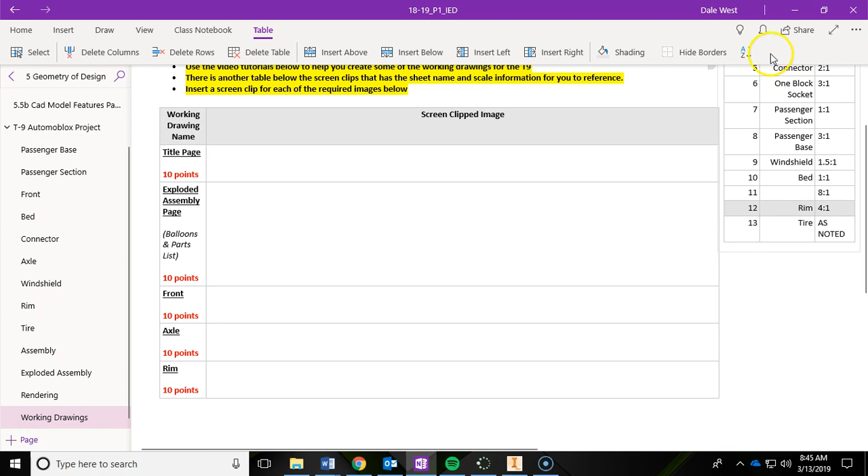In this video, we are going to be working on the axle in the working drawings that we've started for the T9 Automoblox. And I noticed one error that I had. I was missing the rim page. So if you're missing the rim page over here, go ahead and right click up here, make a new sheet, and add in the rim and fill out your title block. And remember, the scale is in here in the OneNote binder. We're going to be using a 4:1 for that scale when you're filling in that title block.

So for this axle, and if you notice, we're kind of jumping around a little bit, so I'm on page 11, so you can double click on your axle page. You'll notice that we again have a full section view, so that cut is going through the entire object from end to end. You have the arrows indicating which way the viewer is looking at it, so they're looking at it in this direction, which would actually be the bottom view, because this view is the front view. So they're actually going to be looking at it in that direction. So after the cut is made, you remove this portion of the material and look at it, and then this is what you would see to show all that interior detail, what's going on inside of the axle.

So we're actually going to be starting with our front view and then using our section view to cut through the object, and then we will add in all of our dimensions. Remember our standard procedures or order of operations. Add your views, add your center lines or center marks, and then save dimensioning for last. So let's go ahead and do this. So I'm going to go into my sheet. I'm going to place views. I'm going to bring in the base. I'm going to go locate the axle.

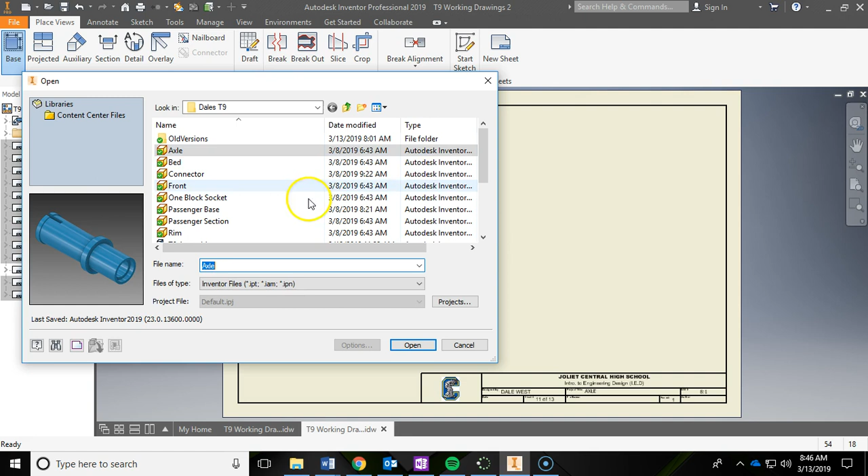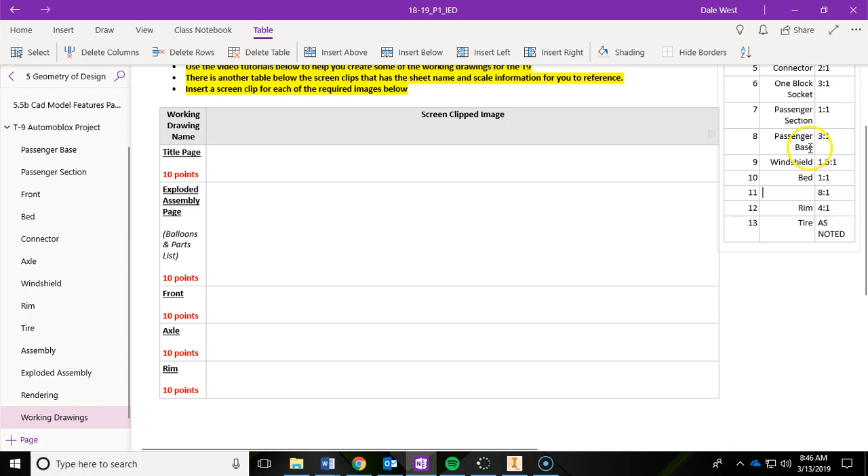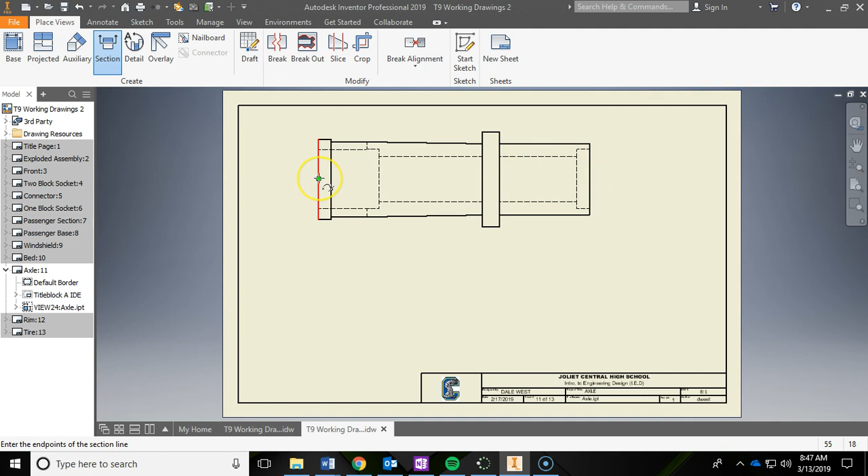And what was our scale on this? The axle, 8:1. What happened to my name there? I lost it. 8:1. So I'm going to have to just type this in. 8:1. Say OK. I'm going to move that up here. And then now I'm going to do my section view. So I'm going to click on section. And now I already had the view selected, so I'm just adding in the cutting plane. So I'm going to reference the midpoint here, because remember, I'm going to try and cut this thing right through the middle. So I'm just going to reference this, hover over it, move my mouse over, left click, go straight across, notice the perpendicular sign, left click again, and then right click, continue.

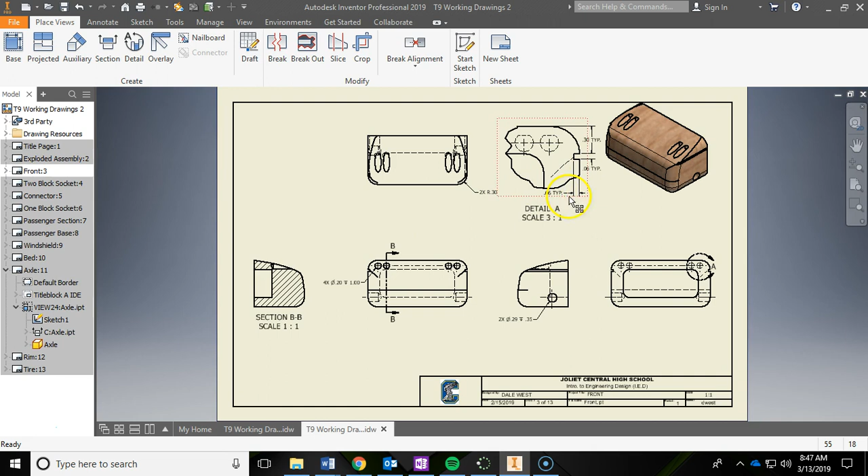And then if I move my mouse down, I can add in the full section view. Your labels may be different. Every time you're adding in a new view, whether it's a detail or a section, these labels keep adjusting. So if you remember when we were in the front, it started with detail A, then section B, and now if you notice, we're doing the next one, which is C. So it just keeps automatically updating that.

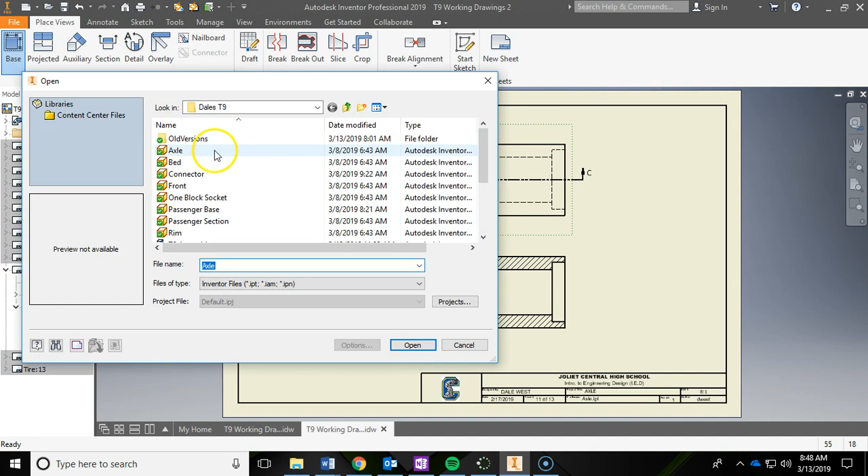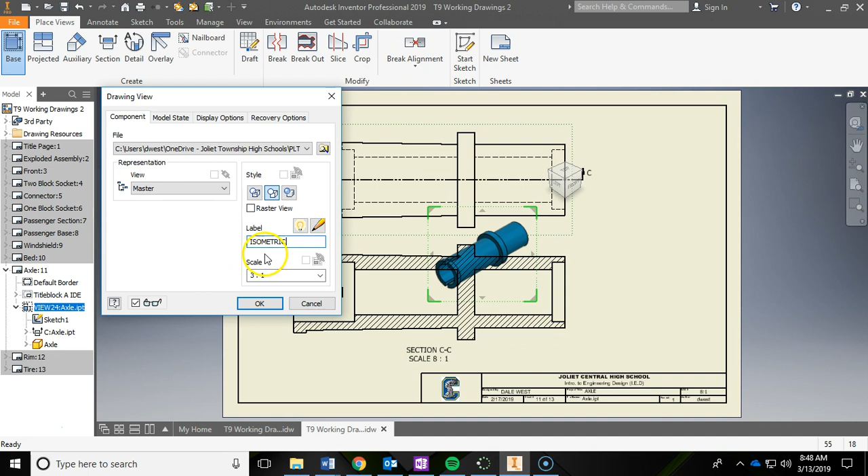The other view that I needed is an isometric, and that isometric is going to be at a 3:1. So I'm going to just go base view, go find my axle, switch to a 3:1, and then on the view cube here, you got to hit this little corner so you can get the isometric. And then since this is going to be at a different scale than the rest of the drawing, so the rest of the drawing is at a 8:1, we need to turn on our label visibility. So I'm going to click the light bulb, and then in all caps, I'm going to type isometric here. And what that'll do is it'll add a label underneath the view indicating the scale, like you see there. I'm going to move that up over in the corner, and then that should also be shaded. So I'm going to double click back into that and change the style to shaded like you see there.

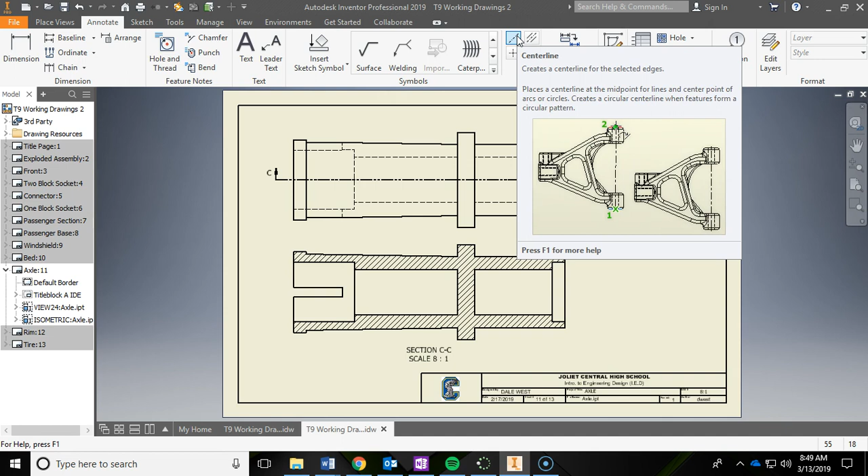And then, so we're done with placing all of our views. If you haven't done a save in a little while, go ahead and click save. Remember, the next thing in our order of operations is to do center marks or center lines. So I need a center line going directly through the middle of this. So I believe in the last one I showed you how to use this center line tool if you wanted to click from midpoints of two cylindrical shapes. Now I'm going to show you a different one called centerline bisector, where you're using outer edges of a cylindrical shape. So I'm going to click on centerline bisector, and for this one I'm going to use the midpoint of this line. I'm going to click there, and I'm going to click the midpoint of this line, and then I'm going to hit escape to get out of that tool.

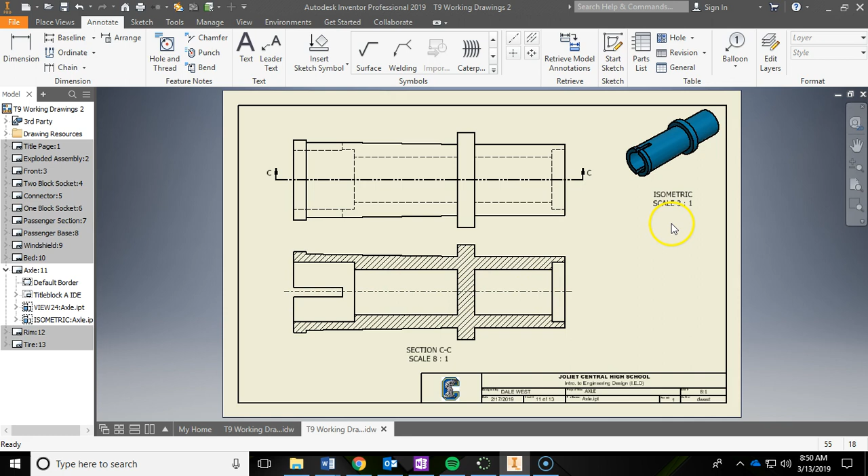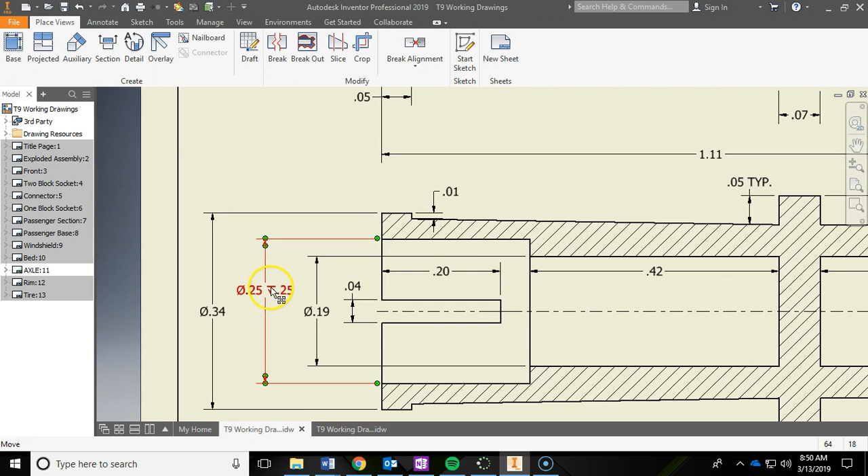Now we got the center line, but the problem is it's way too small, so I'm going to just hover over it, left click and drag it so it extends past the object on this side, left click and drag it so it extends past the object on this side. And now I have a center line going through the center of that cylindrical shape. The last thing that you'll need to do is add in all of your dimensions. Don't forget to add in typical. And then the other one that might look a little different to you is this one. It's showing depth, so it's telling you the depth of this cylindrical feature on that side, and it's telling you the depth of this cylindrical feature on this side.

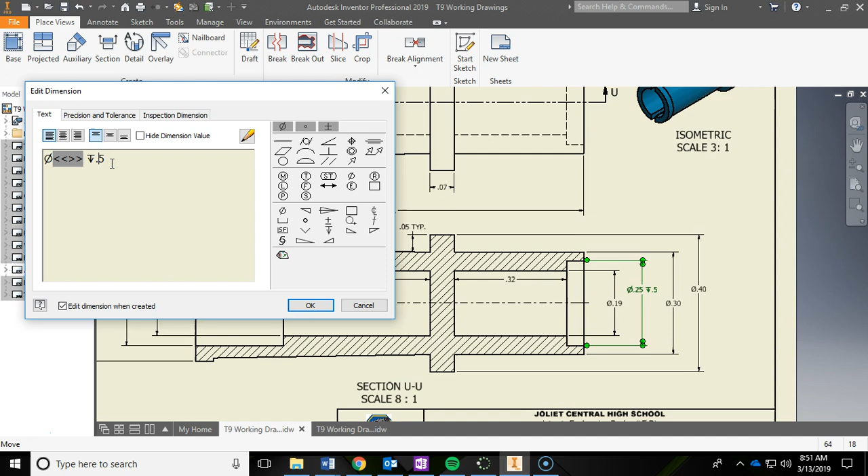So how do you add that in? Well, after you add the dimension with the diameter, if I backspace this, you're going to have to add in a diameter symbol for that, and you'll notice it's right here. So you just click your mouse in front of it, add the diameter, and then click your mouse after, hit space, and add in a depth symbol right here, and then type in the depth, which was 0.5 on that side, and then you can say OK. And whoops, I typed that in wrong. That's not 0.5, it's 0.05 on that side, sorry. So 0.05 for the depth on that side, 0.25 for the depth on this side. So this is exactly what your drawing should look like when you are finished. And then you can again go ahead and screen clip that in the axle area for your grade.